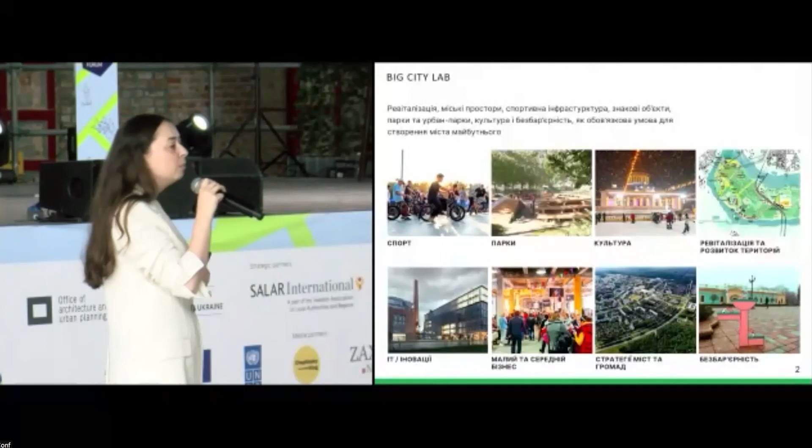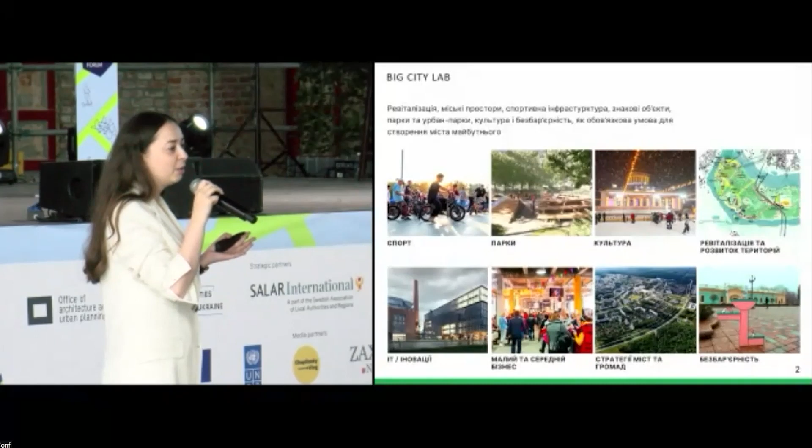My name is Titova. I'm the director of the Big City Lab. It's an urban lab. We are based in Kyiv, but we operate across the country. We cooperate with every major city. We also develop strategies for communities. We work on revitalization of land and infrastructure, but one of our specialty areas, our forte, is public spaces.

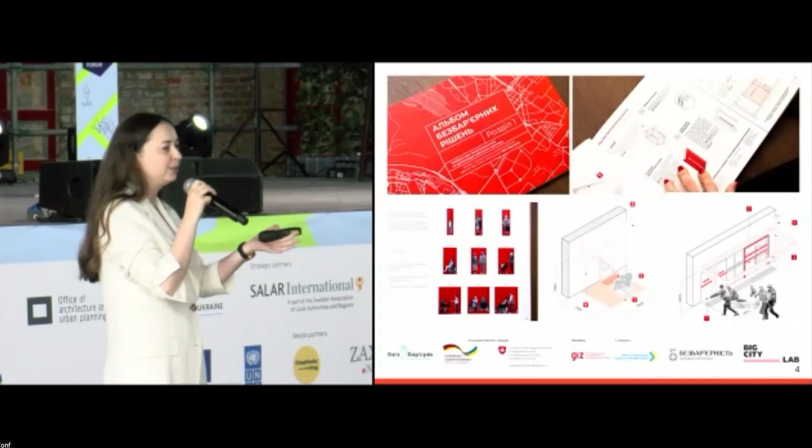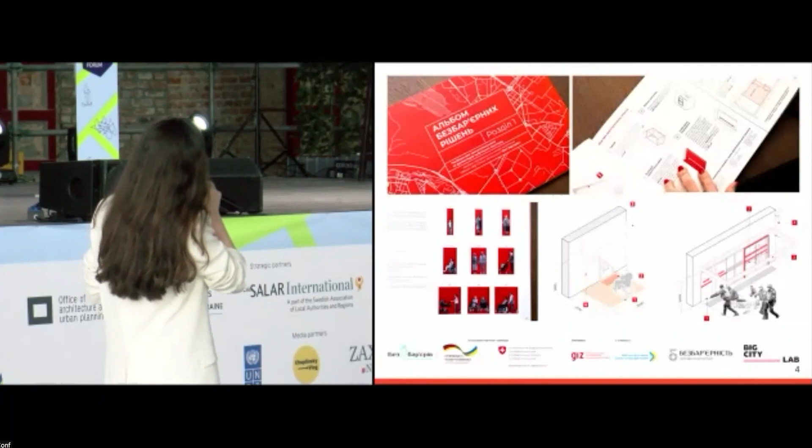That will be the centerpiece of my presentation. So, to build barrier-free environments, our latest initiative is an album of barrier-free solutions. It's a manual for architects, open source. You can find it on the website of the Ministry of Regional Development. If you're a practitioner, you can easily download and utilize it as a tool that will definitely improve the inclusiveness of your work. It was developed with the support of GIZ.

We conducted a study into international practices and analyzed all the legislative regulations. We listened to professionals complaining about our regulations, but we started with the person. We sat down with ourselves. We have a lot of reduced mobility populations with diverse needs, and we wanted to explore their needs. We can make cities comfortable for them, and by default these become comfortable for us as well.

We employed different formats to hear the voices of these people - expert groups. If we're talking about autistic patients, we consulted with specialists. We had focus groups with the parents of such children. As a result of all the surveys, we identified the litany of barriers faced by our citizens and pinpointed the most common ones, affecting about 80% of people, into 4 categories.

And we have 4 chapters in our album. The first one is yards and building porches. The second one is streets, how we create places. Chapter three is public spaces, wide open areas. And chapter four is public buildings.

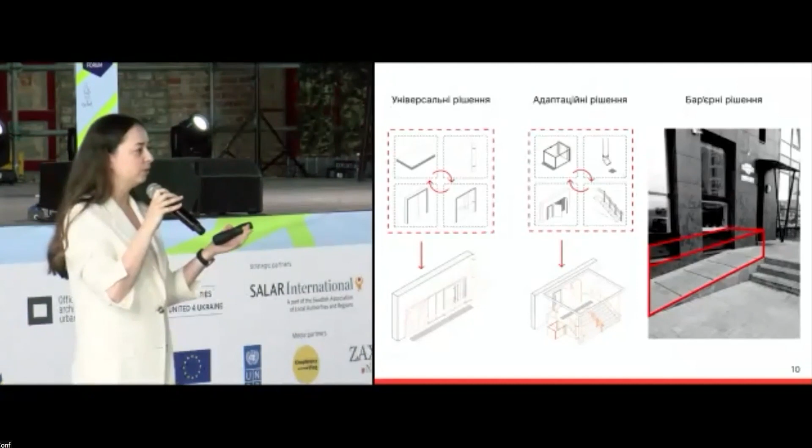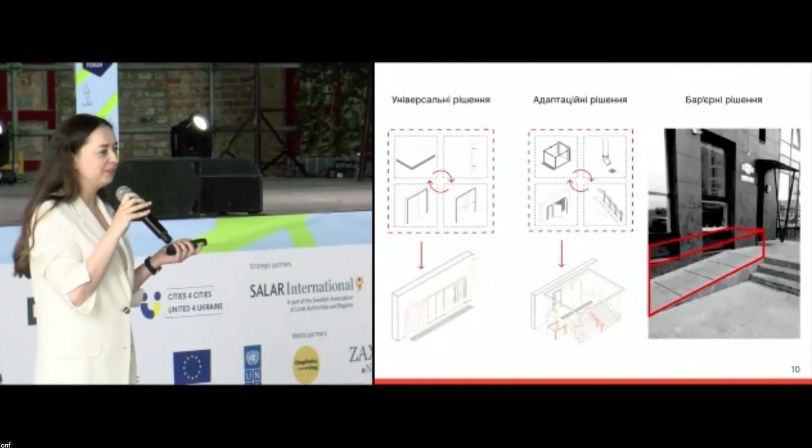Each chapter has universal solutions - how we can build barrier-free environments from scratch. We also incorporated adaptable solutions, because a lot of construction is already in place and facilities unfortunately have some barriers. So what can we do about existing structures to improve and make them barrier-free? For the barrier solutions, we just take photographs and showcase the way forward.

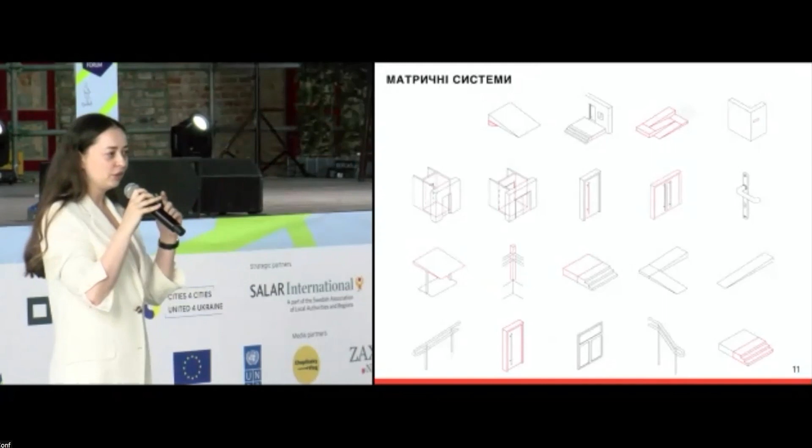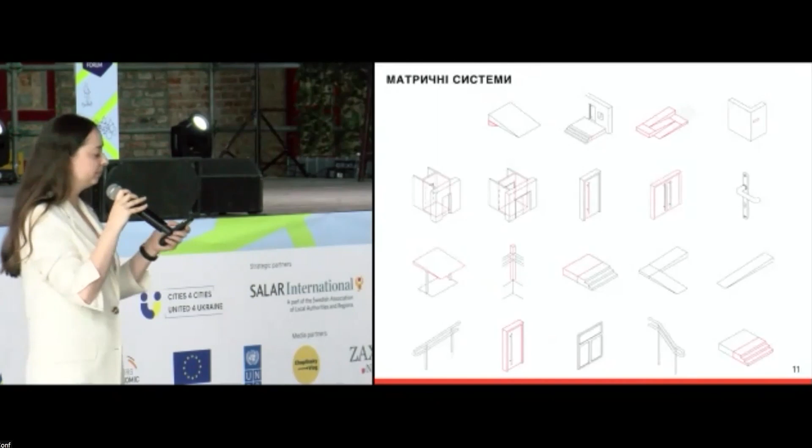And we have about 57 scenarios, and we broke down each scenario into elements in the form of matrices. For example, the scenario of an entrance into a building - we detailed everything down to a doorknob. This is an adaptable solution.

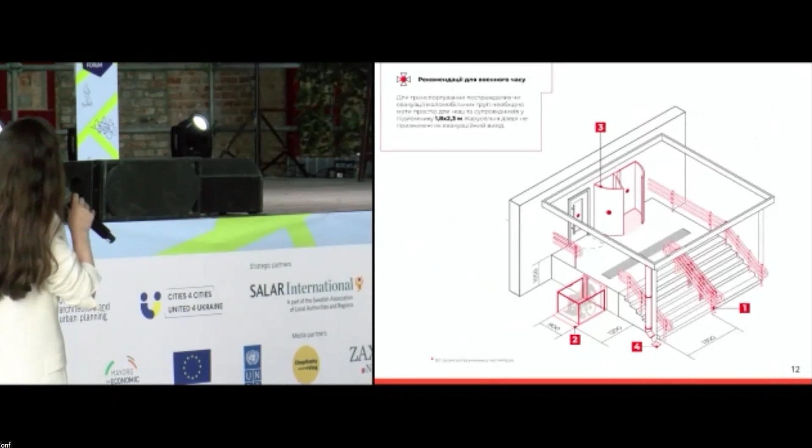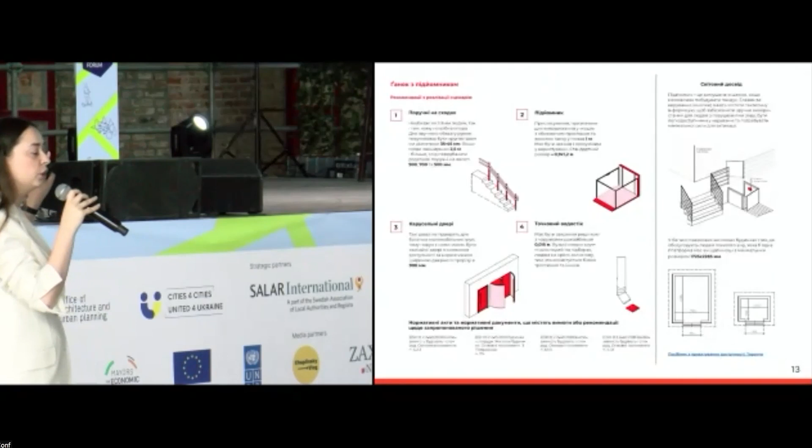We also added some recommendations for how we can ensure security in times of war, and how these elements fit together in the space. You can also see what's behind the space. Each of the 57 scenarios looks like that. We have a model, and it follows the same logic, with a nuanced description of the model.

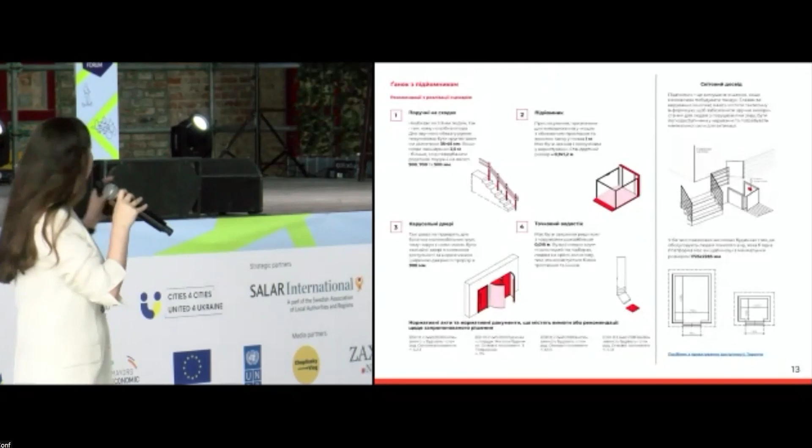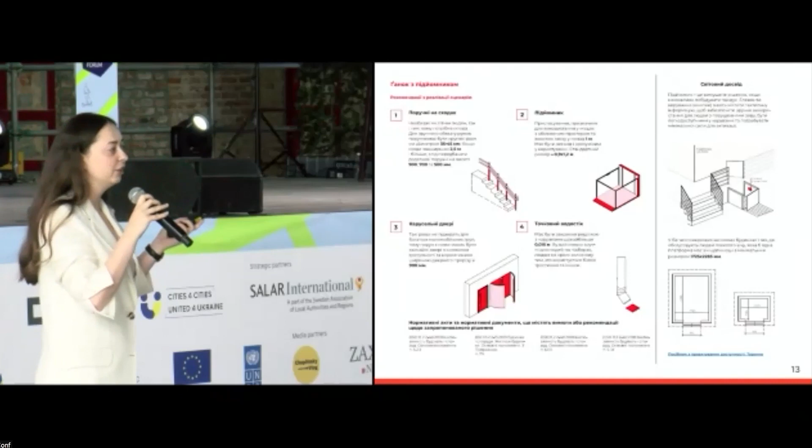The album is much more than construction regulations, but of course we cannot go beyond, or violate, state building codes. We have some references to other manuals, like, for example, Toronto's, to show how such things are sorted out elsewhere, if you're interested.

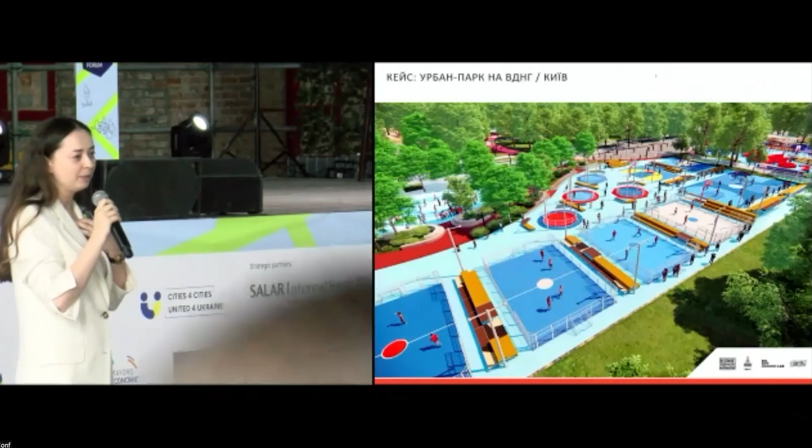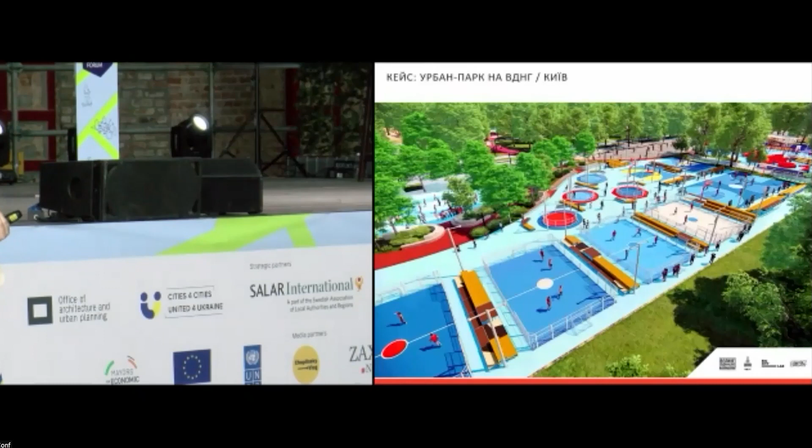But I would like to show one case of how everything works in practice, demonstrating the principles of universal design in an urban park. It's associated with people with endurance, strong people, but it's really about the details of the space and barrier-free design, because it's all about the manifestations of a human being that we might overlook. You can see colors, you can see contrast, and the sizes here.

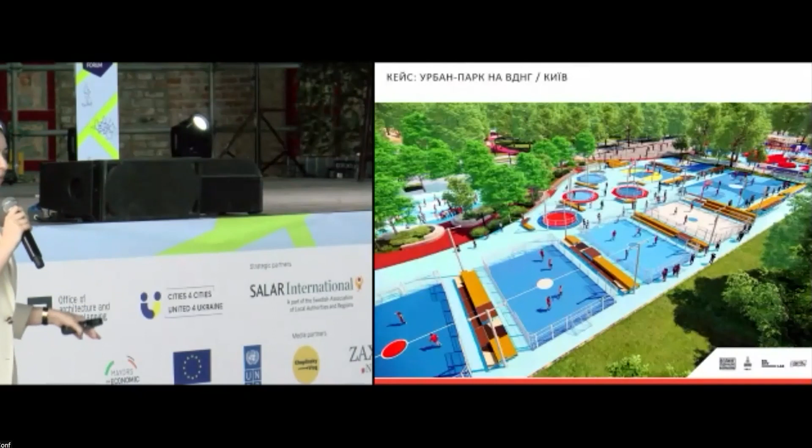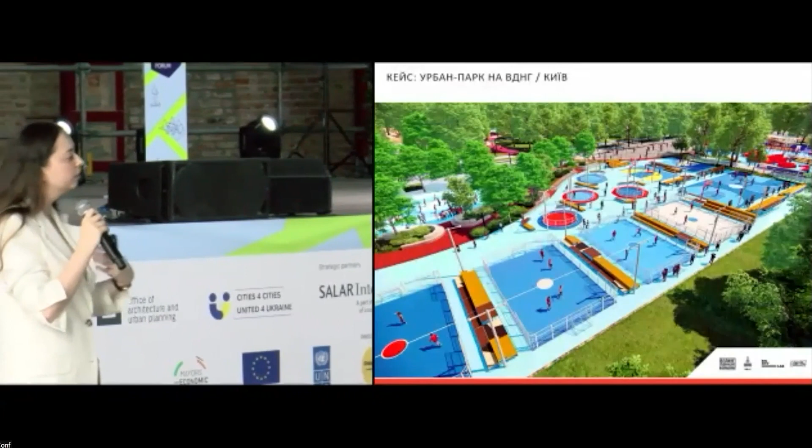It's a large area. You don't really want people with balls to intersect with people on scooters. You don't want children mingling in ways that cause conflict - you want each and every group to have their own private zone, and you want to navigate them throughout this space.

We had this experience before when we created a space on Khortytsia Island in Zaporizhzhia, near the hydro station, and we believed the public space was successful if all the married couples came there for their photo shoots. We didn't set that same objective for this project, but it happened anyway.

Why is this project successful? Where can we create barrier-free space? We analyzed the interests of different groups.

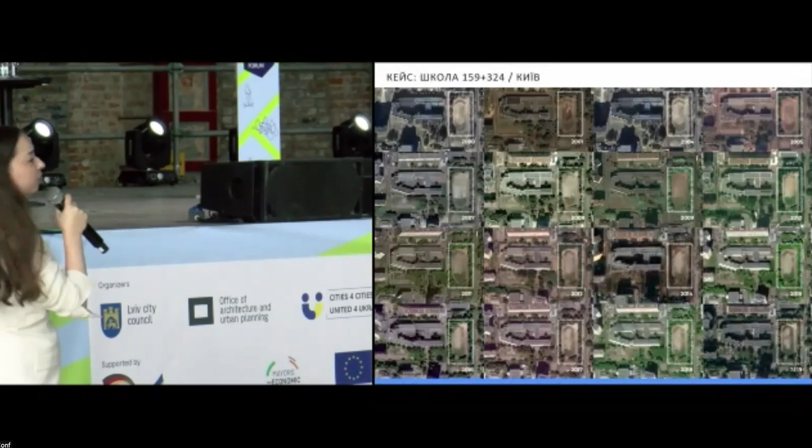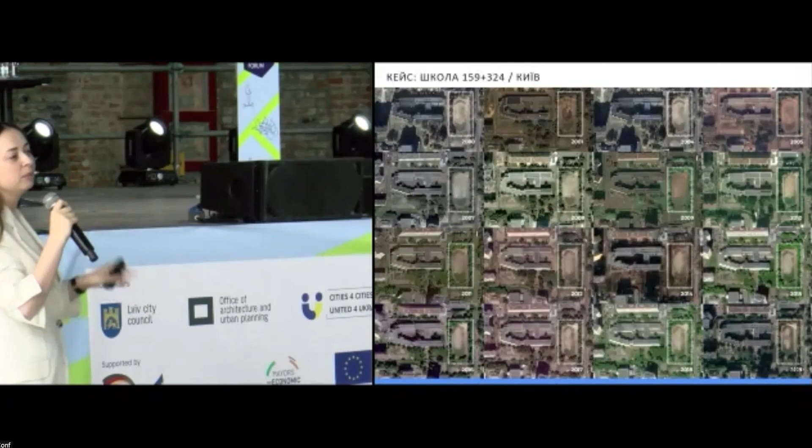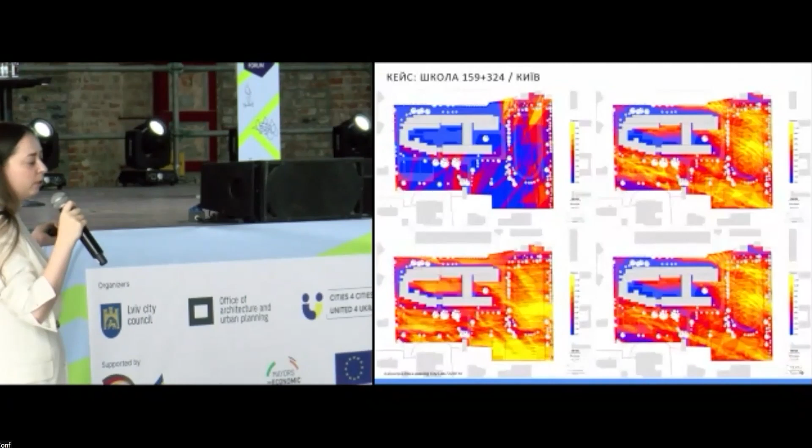This is a screenshot from the satellite, from 2000 and 2019. Things changed over time. There used to be a stadium, but people come with dogs, with young children, come to play football.

This happens because there's no real alternative, so everybody keeps coming.

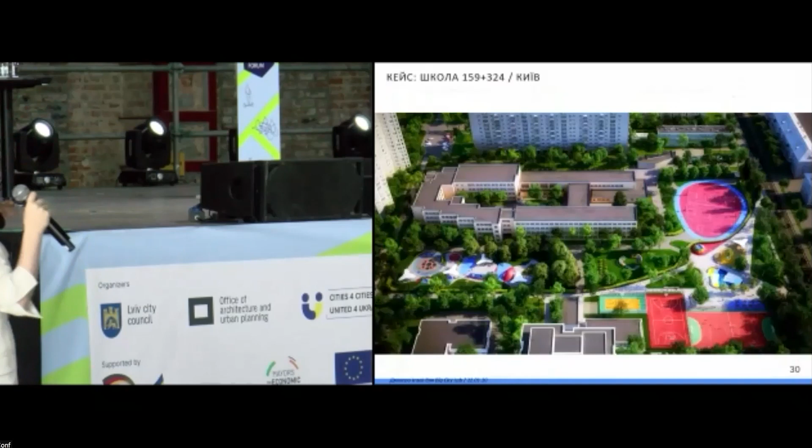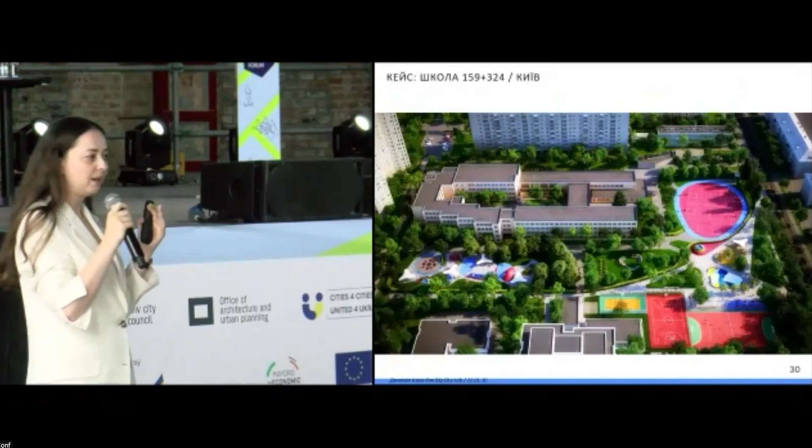So we decided we should separate the space, with room for older people for their needs, for younger school kids, for the adjacent community, so these streams don't create dangerous situations, because school should be safe.

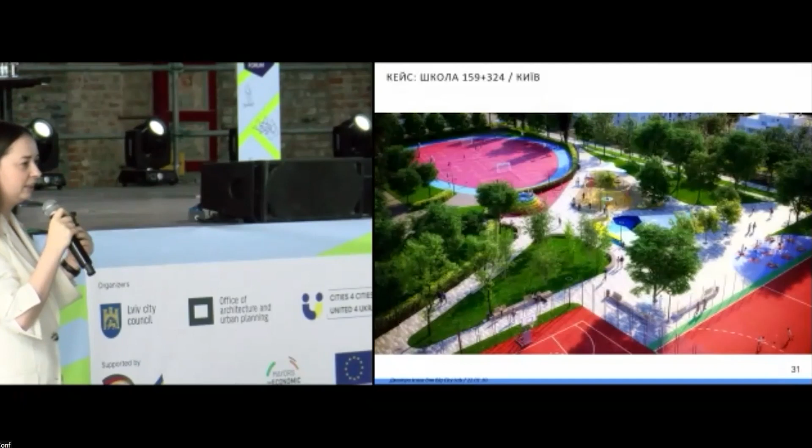So based on the design of this public space, it's clear who it's intended for and who is welcome to come there. There's the territory of the school, the territory of the community, and a very slight division just to channel the streams to the transit area.

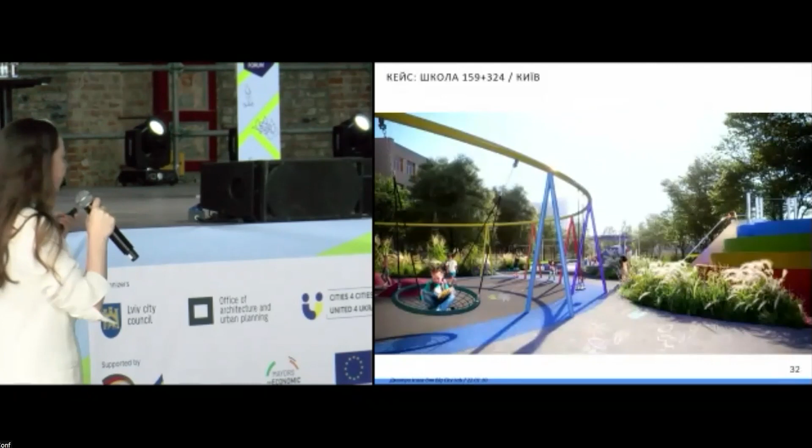So that people won't go too close to the school while the kids are there. And also there's a territory where you need to jump and leap and rock yourself, and other interesting things.

Nobody is aware of this because it's a yard. But of course, kids shouldn't break something there. So respectively, hardly anybody visits, just an occasional holiday once a year, but the canteen, for instance, overlooks the yard.

So the client needs to be ready to use what we're creating. And the headmaster said, maybe let's give it a try.

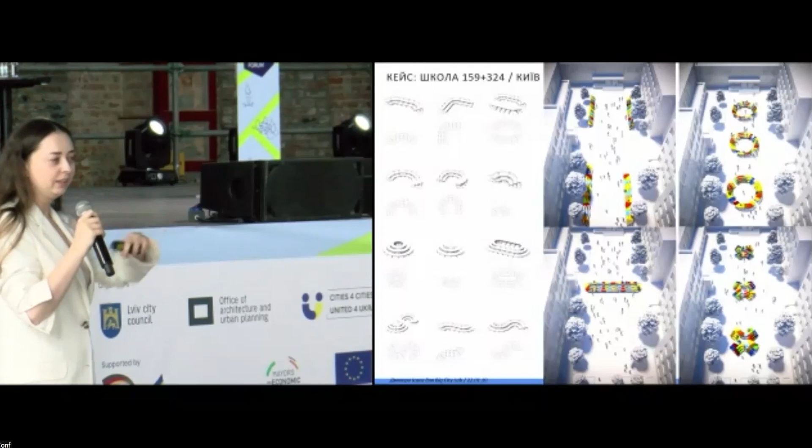Let's have some options or test it. The suggestion is to take modular elements and give it a try.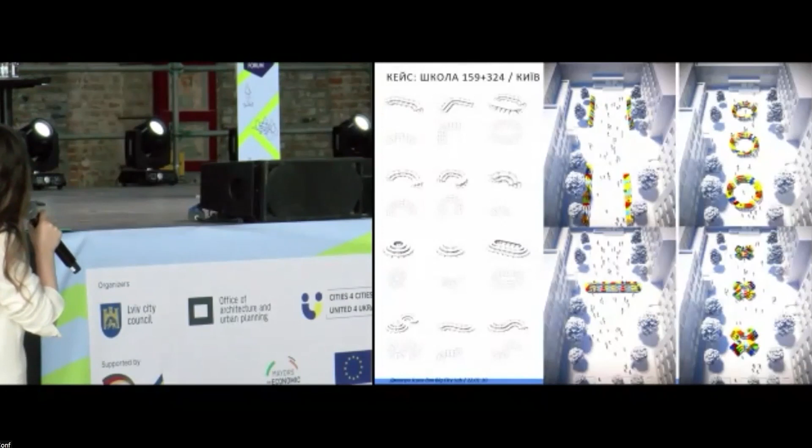And the same story for the inner side of the school. You have heard from participants on the stage, heard from Transform.

What can we do? We're in a project with the World Bank now. We visited a couple of schools and they all have the same issue - they don't know how to get a person inside, the territory is inaccessible, there's a curb to enter, a threshold. But even if you change accessibility, you need to add other functions.

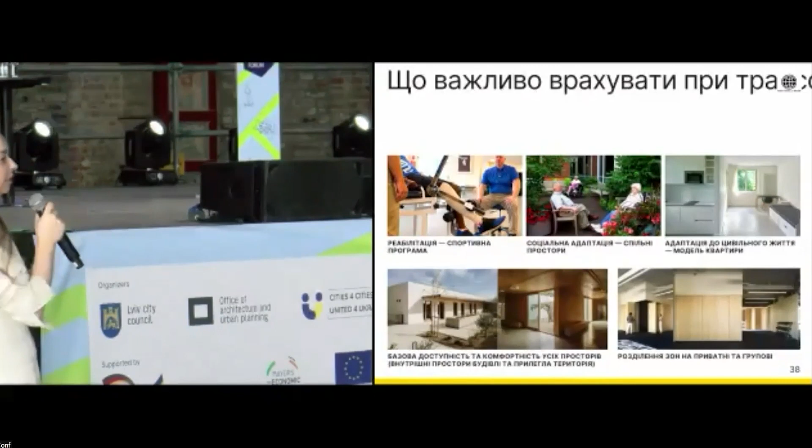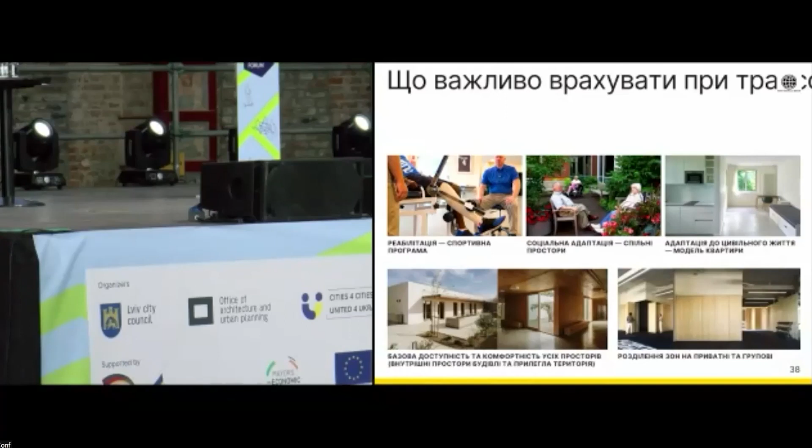It's not just about staying in bed - the program needs socialization, where you can spend time. This gets adapted to real life, so you need an apartment-like space where you can learn how to walk, how to hold a fork, how to wash yourself, so that people could live in the future, both in private and public spaces, so that people with different needs could communicate.

Kryvyi Rih has one main street running through it, part of the city development program. Once again, this city was designed so that an aircraft could land during wartime. We're having a war, and we need the street to allow this kind of separation, like the Dnipro River in Kyiv - it must be possible to cross and the width will suffice.

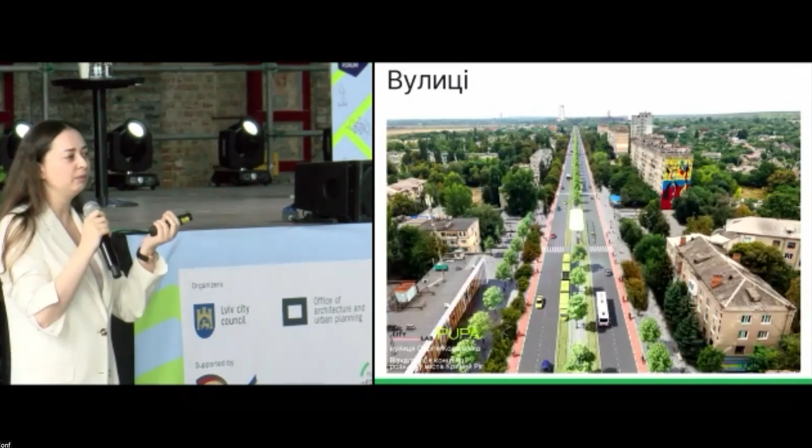Lanes running both directions, also two lanes on both sides, a bicycle lane, and planting trees to make it more of a boulevard with a central tree line or avenue.

Another example is Slavutych, a small town of about 10,000 people. This is a former polyclinic which is idle and empty, but it has the right size for what's needed. So it's simple to strip it of the hospital feel and add constructions to create balconies - very simple solutions that don't require a complex project.

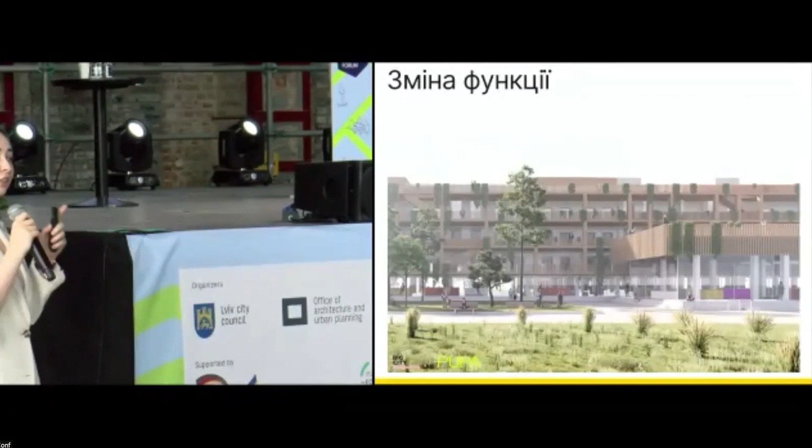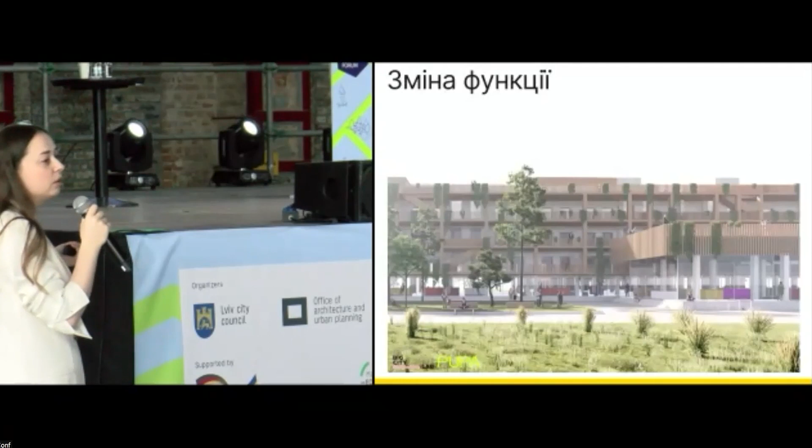In this building you could have a ground floor for amenities, and on top of this, 100 flats for people to call their homes. Building 100 units from scratch would be much more expensive - refurbishing old Soviet buildings that we don't even use could be done for the entire city.

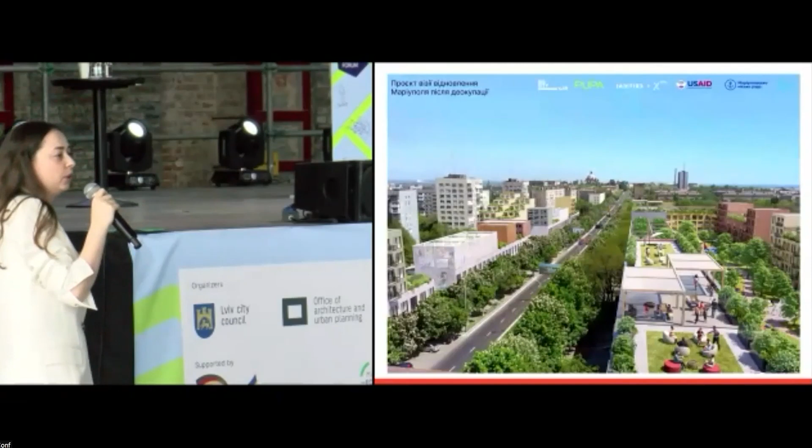Just yesterday, the vision for development by 2040 analyzed how we should preserve the character of the city. On the other hand, we want to make it new and modern, but still preserve the memories so people understand this is the same Mariupol where I got married, where I had children, and so on. I've arrived at the same principle that David Sim discussed today.

The Soviet-era streets are too wide and massive. There are yards, but it's unclear where the street begins and finishes, whose yard it is, and so on. So we're making this more dense.

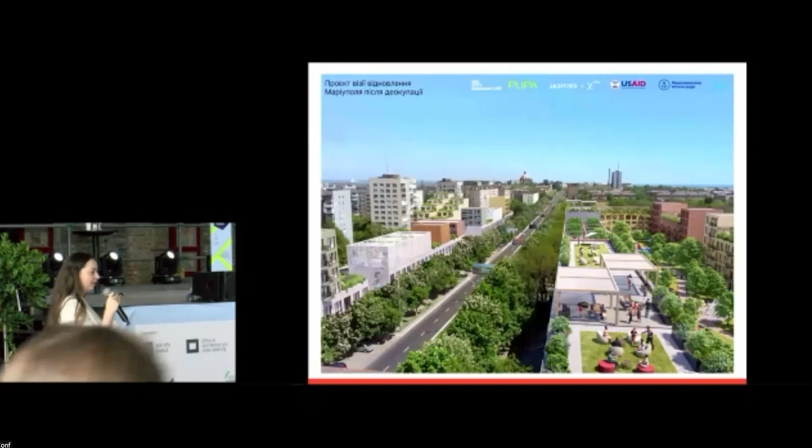We're adding new architecture, mingling it with the old, while at the same time improving life within these old Khrushchev-era buildings. We could do the same with Mariupol, preserving the character that it has, but also making sure it meets our present-day needs.

In the center, we want to preserve buildings that have value and significance - this is a great example of Stalinist-era architecture, and these are still intact. They haven't been damaged, but we want to make sure they can satisfy people's needs, so we can do some interventions, because the buildings will need to be refurbished anyway, to meet modern conditions while preserving the character.

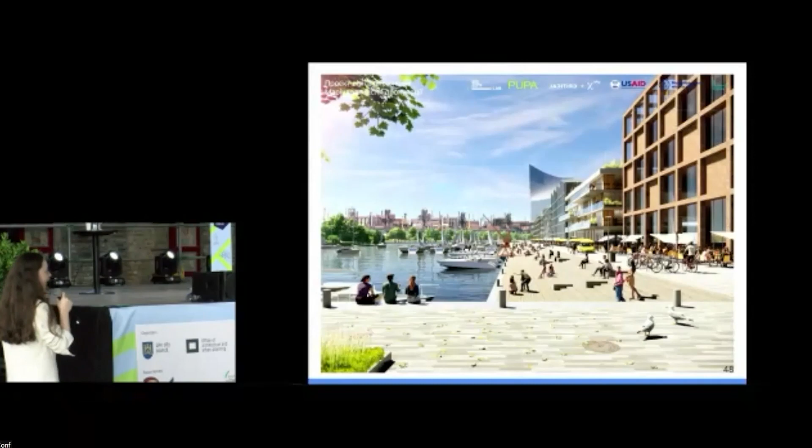This is a view between the center, the city center, and there's basically an empty aisle - this is the way it looks. We understand this is an industrial landscape, but we believe we can recover the center of Mariupol and give the city a new center and a new face, to signal that we have to recover and create what we used to have.

In this way, the character of the city becomes a backdrop for the new one.

I'll leave you with this - we're going to invest a lot in the reconstruction of Ukraine. It's important, but we have to ensure that each hryvnia we invest in recovery and reconstruction should also invest in the dignity of our people.

Thank you, Victoria. Thank you for telling us to treat people with dignity. And I am deeply convinced that this set of principles has to be the cornerstones.

Recovery and an inclusive approach means taking into account that 1 million people are serving now, with rotation happening, so the people who will require support will grow in higher numbers.

I will stay here for a little while, but then I will have to leave. Okay, if you have some questions, please raise your hand.

I have a short question. You mentioned in your presentation that in schools, lighter shades are used for people to relax and take on things. I wanted to ask whether there are examples of colors that could be used to create a cozy atmosphere.